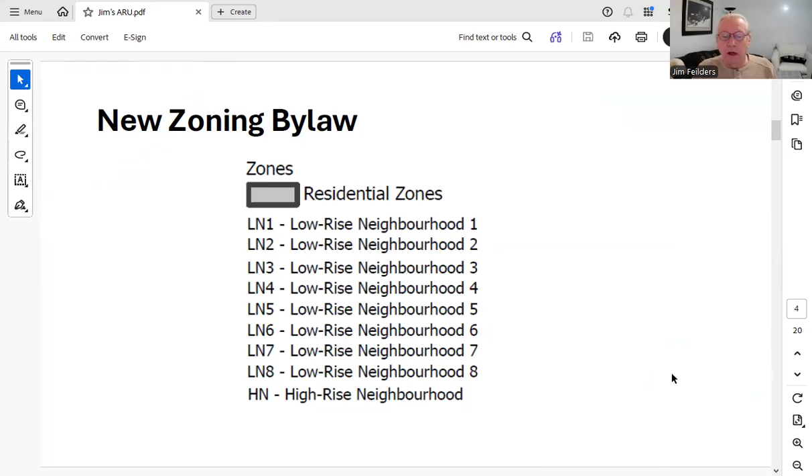There's a new zoning bylaw in Burlington where I live. They've changed the zoning areas from about 38 different zones to 9, 8 of which are low-rise neighborhoods and 1 high-rise neighborhood. This shows the southern part of Burlington, where I live, and I'm in the LN4 area.

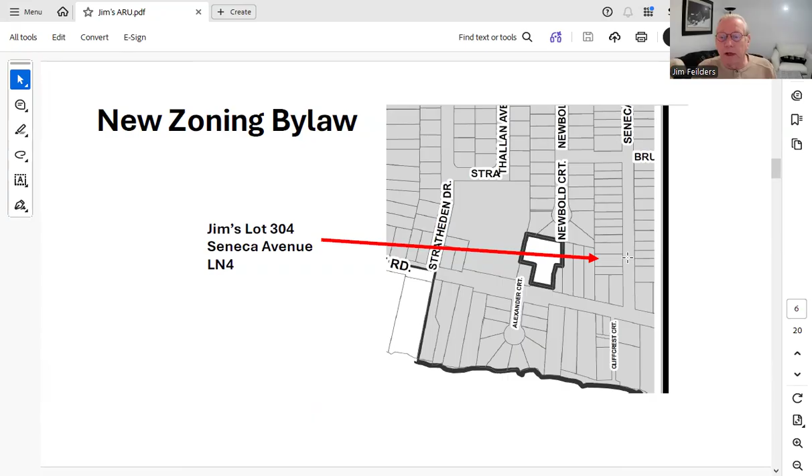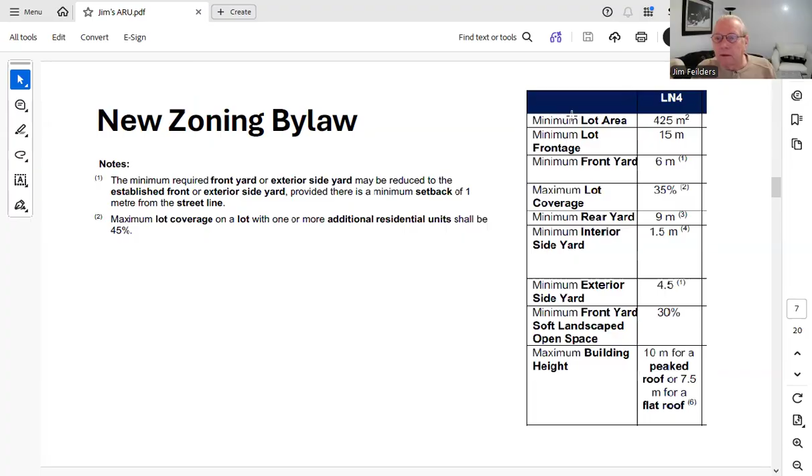And we zoom in on my street, which is Seneca, and the lake is on the bottom. And you can see my lot is number 304 Seneca Avenue. I am in LN4, and if we see the details for that, if I can remove this figure of myself. Anyway, for LN4, these are the criteria for developing and building on the lot.

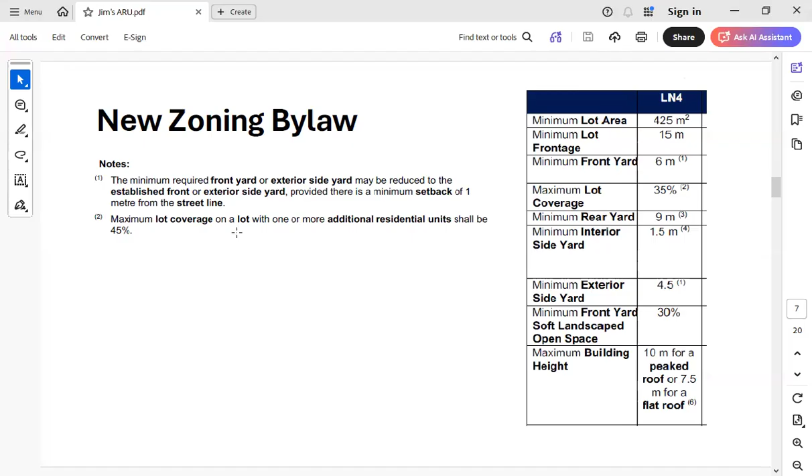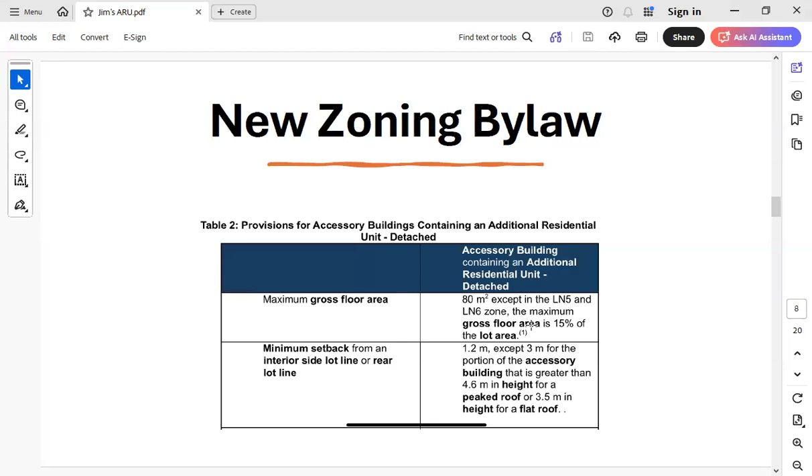Of most interest is the maximum lot coverage of 35%, but there's a footnote that says 2. If we look at that on the left, the maximum lot coverage with an additional residential unit can be 45%. Now, in addition to that, there is a limit on the size of the unit. So we have to look at both the allowable maximum and the maximum for an individual. So an individual additional residential unit is 80 square meters in LN4.

So we look at a calculation of what would be the maximum at 45%. And my lot area is 64 feet by 139 feet. So it's a little under 9,000 square feet. It's a larger lot than normal in this neighborhood. And 45% of that would be 374 square meters. My existing house takes up 217. So we are left with 157 square meters. And that's much more than the maximum of 80 meters. So I am limited to 80.

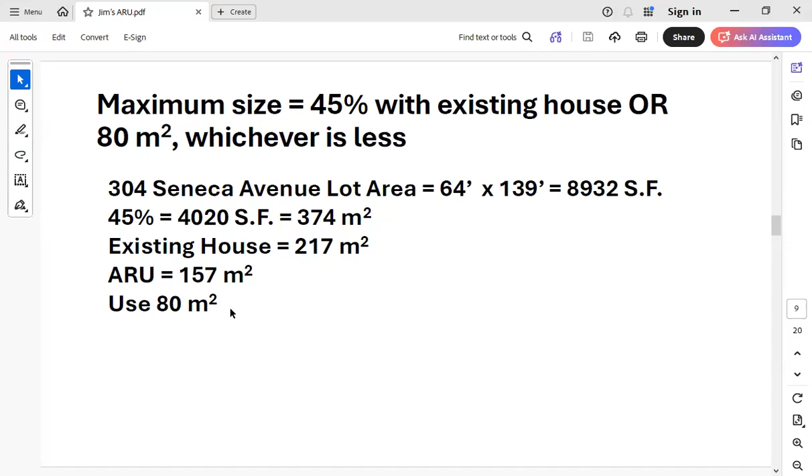This is a site plan showing the existing house with the attached deck. And the blue area is the maximum building envelope for an additional residential unit. We have Seneca Avenue out to the right, and we have a 4-car driveway with 2-car garage, so there's lots of parking.

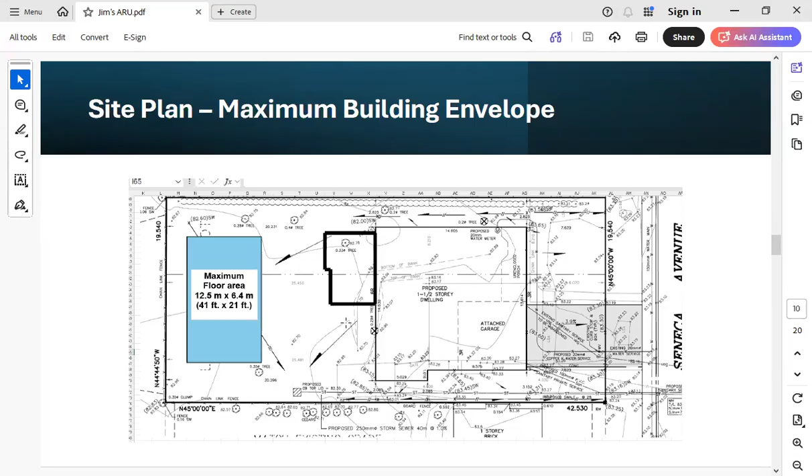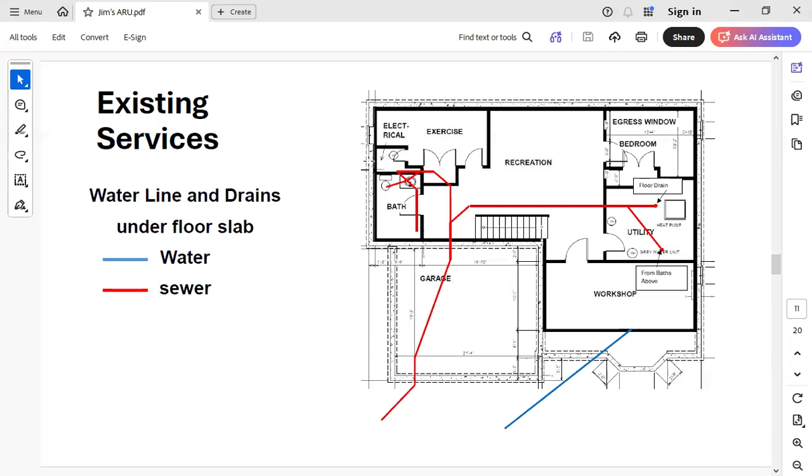We look at connecting services. This shows the underground piping for the sewer in red and the water supply coming in blue. So I've determined that we can have a takeoff for water, sewer, and electricity in the little electrical room on the upper left of the drawing. And the way we would do that, we would just do an open trench and run the services into the underside of the residential unit.

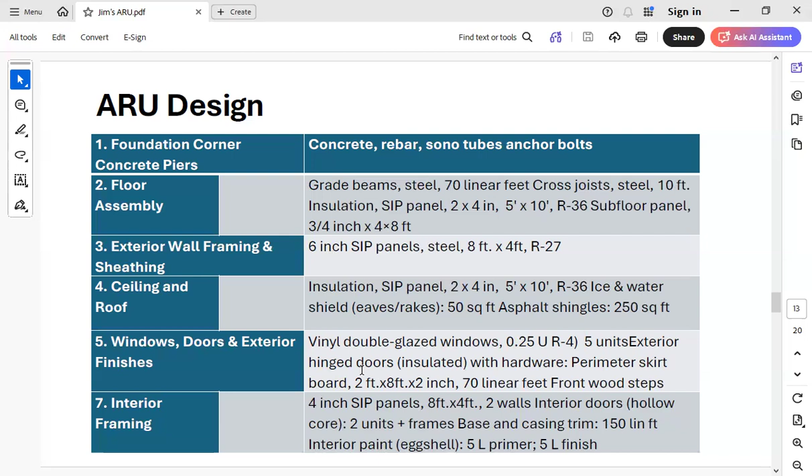We've looked at the components needed in the design, looking at a foundation, and that would be on concrete piers using sonotubes. And then the floor assembly would consist of beams and cross joists, insulation, exterior wall and framing. We're looking at 6-inch SIP, structurally insulated metal panels. Ceiling and roof will be also panel and insulation. There'll be windows, doors, and exterior finishes, and internal framing.

For mechanical, electrical, and plumbing rough-in, we have HVAC. We're going to be using roof-mounted heat pumps. These are common in recreational vehicles and are very economical and efficient. We need 2 of these. Electrical, the minimum electrical code says we need a 100 amp panel with appropriate breakers and switches and receptacles. Plumbing will be PEX piping and PVC drain pipe to connect both the kitchen and the bathroom.

Flooring will be vinyl plank type of style. Appliances will consist of an induction hot plate, an air fryer / toaster oven, microwave, range hood, TV, computer, and coffee maker. We are not using a conventional electric stove and cooktop range, as that uses a lot of electricity. Furniture will be provided, 2 beds or maybe a Murphy bed, could be bunk beds. There'll be desks, night tables, tables and chairs, a sofa, and a storage unit.

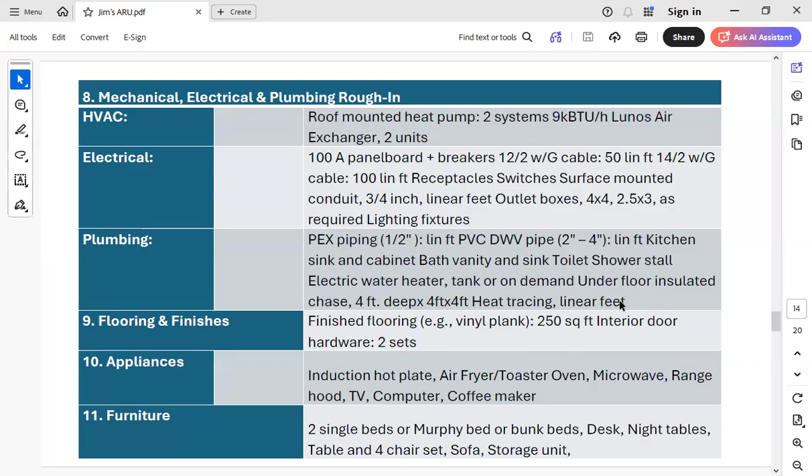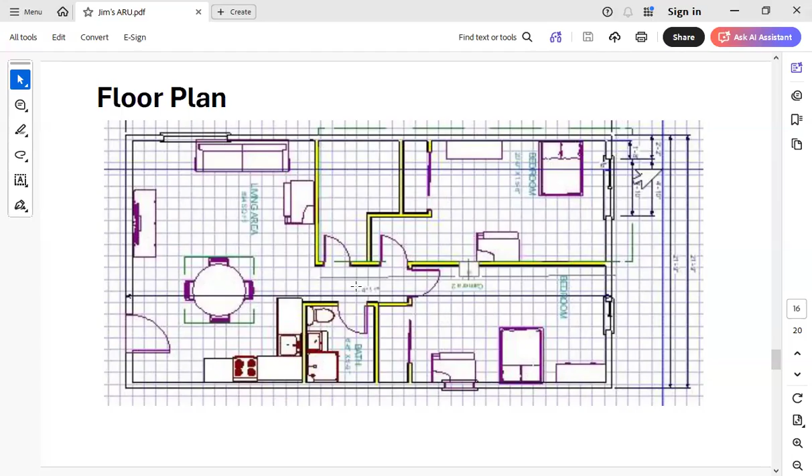This is a dollhouse view, as it's called, looking at it from the top without the roof on. So we have 2 bedrooms on the right-hand side with attached closets. There's a storage room in the middle. And we have a bathroom with the shower, sink, and toilet. And the living, dining area and kitchen has got furniture and TV stand and TV.

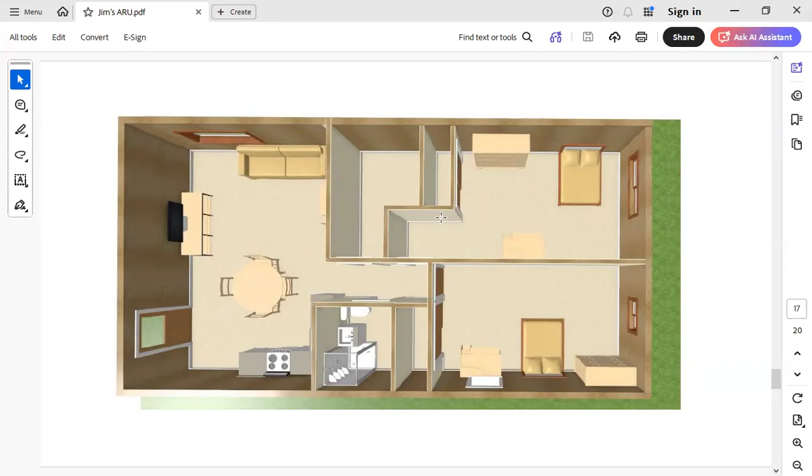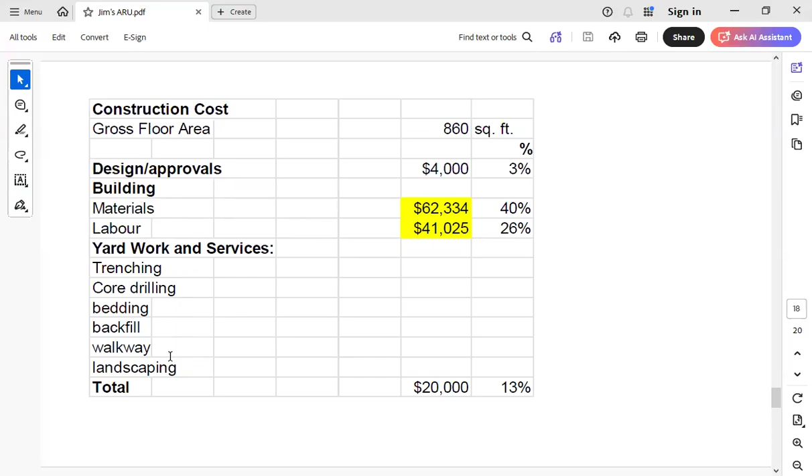So we've looked at the gross floor area of 860 square feet, which is equivalent to 80 square meters. And the various items that we have to cover. There's design approval costs in terms of the building. We've got a more detailed breakdown of materials and labor costing around 100,000. There's the outdoor work for trenching and drilling through the foundation wall and laying pipes and doing landscaping. Electrical services can include cables, hardware, the panel, circuit breakers.

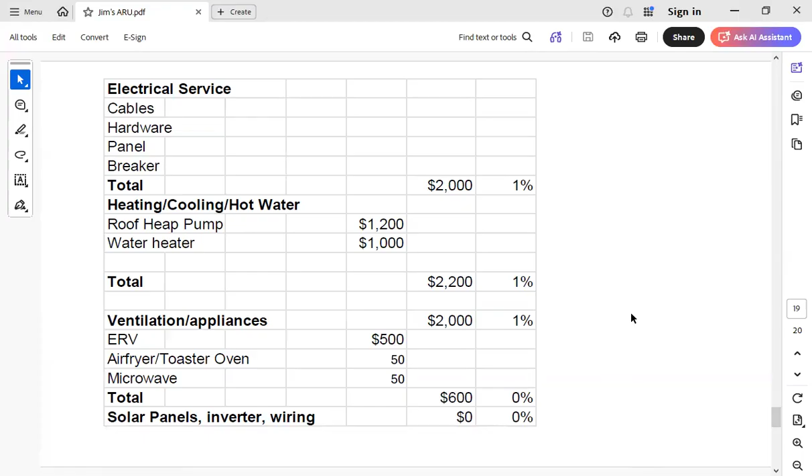And we have heating, cooling, and hot water with the heat pump, as mentioned, and a small electric tank water heater. There'll be ventilation using an energy recovery ventilator. And as I mentioned, the cooking appliances. And we have a total there. Some units will have solar panels with an inverter and wiring. There was too much shade at this site, so this wasn't a possibility for this build.

Furniture, as mentioned, will be bought economically through thrift stores or Habitat for Humanity. Total comes to 135,000 with a 15% contingency, which brings it up to 155, and the build cost per square foot is $181.